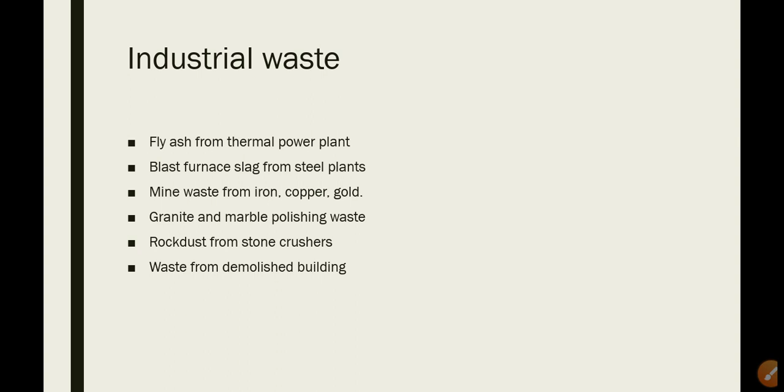Fly ash. Fly ash is obtained from electrostatic precipitation in thermal power plants. Fly ash generally contains silica and alumina. These products are highly active in combining with calcium hydroxide at ambient temperature in the presence of moisture, leading to hydrated Portland cement. That is, fly ash has similar properties to Portland cement.

Fly ash can be used as pozzolana in lime pozzolana cements. Addition of gypsum in small quantities will accelerate the strength gain in cements. Blending of calcium hydroxide, fly ash and gypsum is important if the full strength of the mixture is to be achieved. The strength is low at 7 days, and a dry mixture of calcium hydroxide and fly ash should be used within 7 days of mixing, since the shelf life is very low.

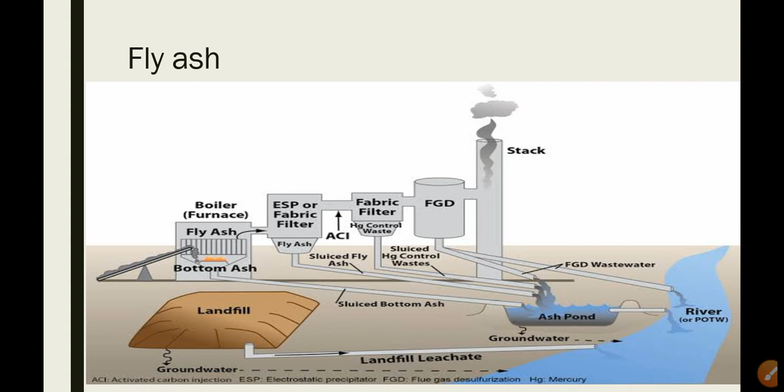Now, in this image, the bottom ash is brought through this elevator and put in this furnace. There are two types of ashes you obtain here. One is the fly ash that gets combined with the air due to its light density; it just flies off. That's why it is called fly ash, and whatever has higher density becomes the bottom ash. This bottom ash, through a sluice, is collected in the ash pond.

Next, what happens with the fly ash? The fly ash is taken to the next segment. In this, the fabric filter or the electrostatic precipitator is used, where the fly ash that was in the air is trapped, collected at the bottom, and sent again through this sluice gate to this ash pond.

Even after this filtration, some more lighter particles are trapped in this fabric filter, where the Hg control waste, that is your mercury controlled waste, is collected and again sent to this ash pond. And in the next stage also, the lighter fly ash particles are collected in this cylinder and sent to the ash pond.

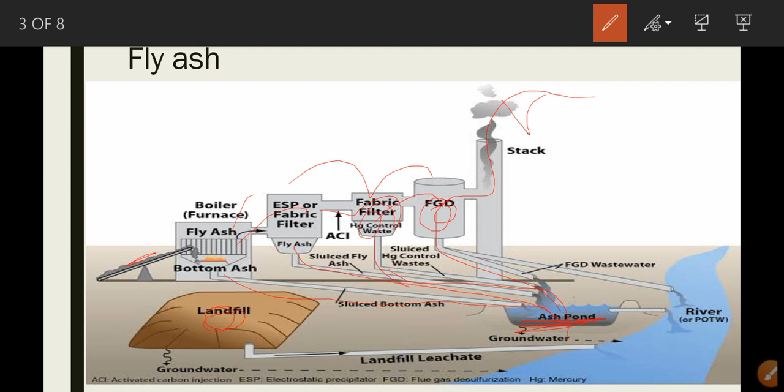Next, from the landfill, whenever you have this ash pond, the water and the bottom ash are mixed together, and as it settles down, the ash in the pond is collected at the bottom and the cleaner water is let out as an effluent into the river.

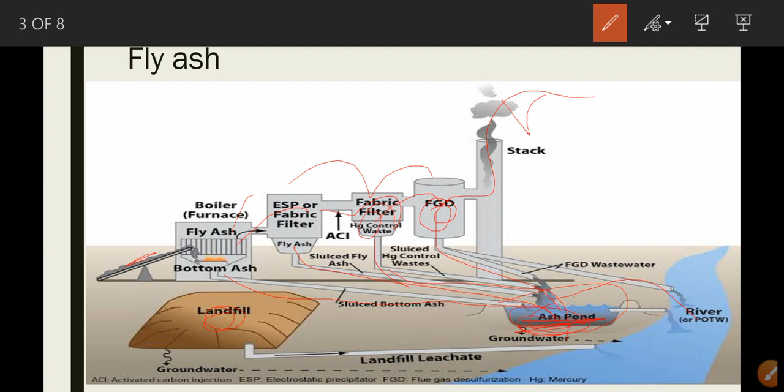Again, whatever concentrated water is there, it is sent to another dam. Again, the cycle repeats till the water is clearer. The slag from blast furnace has cementitious properties. It can be used as a substitute for your cement.

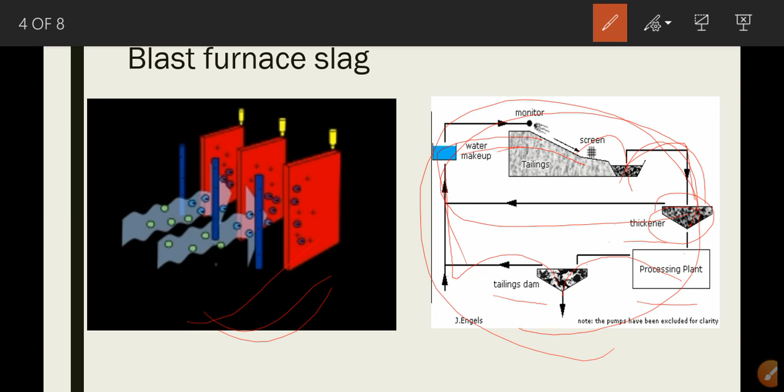Portland blast furnace slag cement is made by grinding normal clinker with slag. This cement has sulfate resisting properties and is ideal for use in aggressive environments. That is sulfate resistance. Normally, for seashore structures or chemical industries, the silos made for chemical industries, which are very reactive to sulfate. In construction of such silos, you can use this blast furnace slag cement.

Now, gold mining tailings. Gold is often extracted from finely crushed granite. The waste granite dust after removal of gold is a fine material of no use. It is often predominantly silty in nature and does not have pozzolanic properties. That is, we cannot use it as a cementitious material; it does not have any binding material in it.

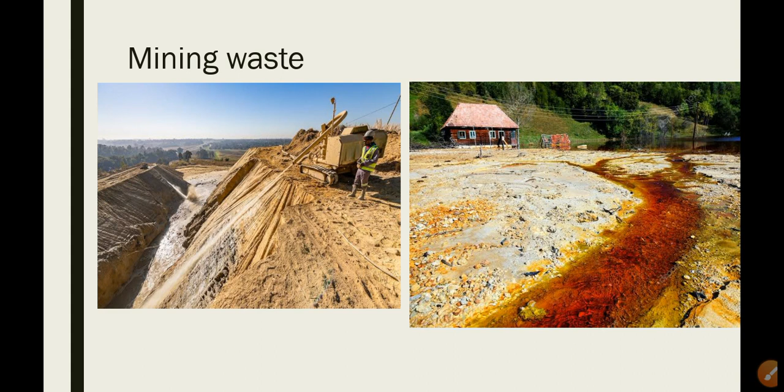The Kolar Gold Fields of Karnataka have 35 million tons of such waste. It can be ideally used for building blocks after mixing with cement and sand. Now, these gold mine tailings are not reactive in nature, so they can be used as a fine aggregate supplement, or you can say a replacement. Okay.

Now, we go for the screening of this. After screening, we differentiate whether the size of the particles is less than 4.75 mm sieve or greater than 4.75. If it is greater than 4.75, it can be used as a replacement for coarse aggregate. If it is less than 4.75, it can be used as a natural sand replacement. Even in this replacement, you have to check the inert properties of it.

Next, we have the percentage of it. Sand particles to an extent of 79% and silt particles to an extent of 19%. In Karnataka, Kudremukh Iron Ore Company has stored the iron ore tailings, which amount to 150 million tons. Okay.

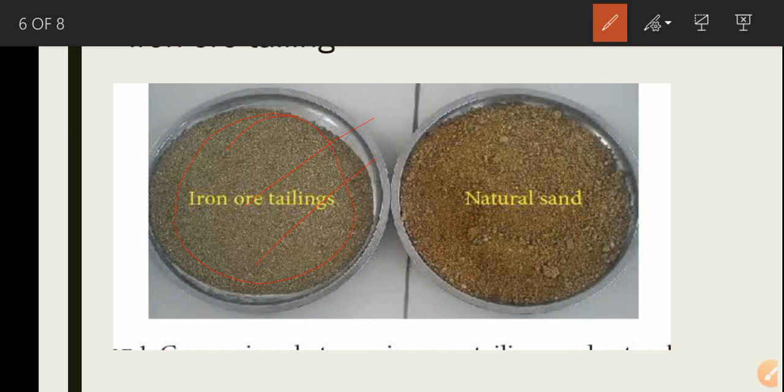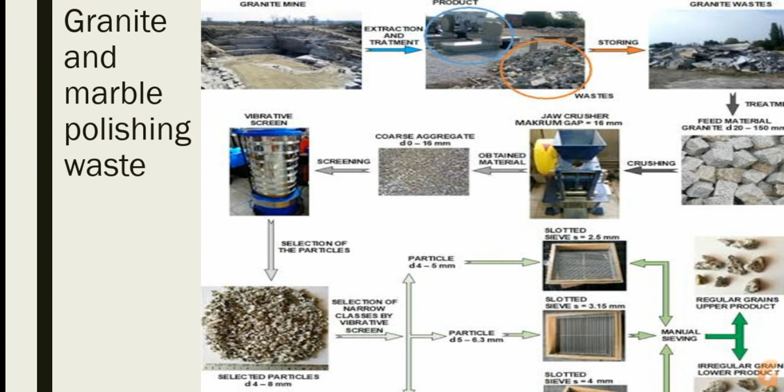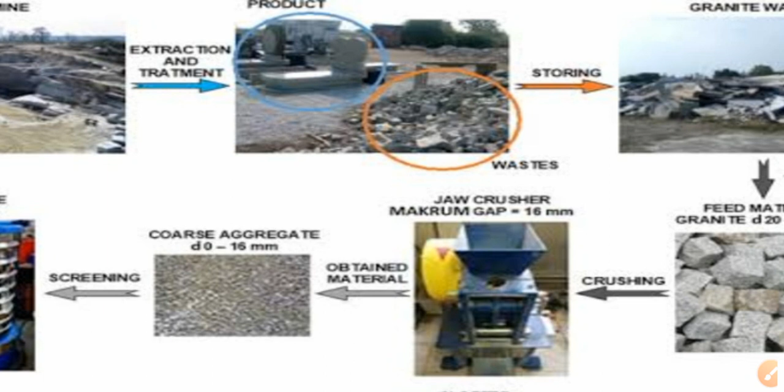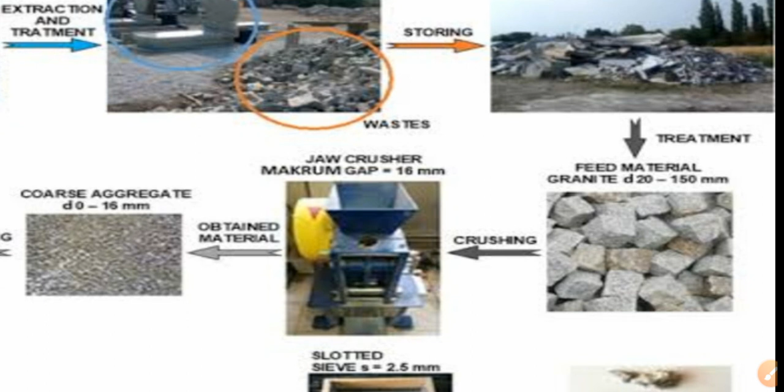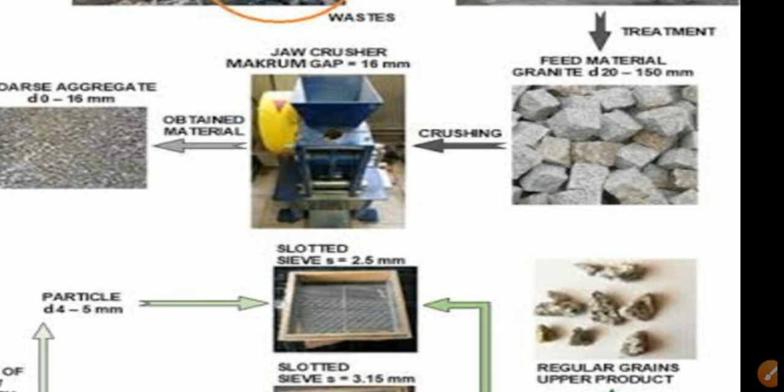Next, here is the fine product, and this is the waste, when it is not in the proper shape and size. The other waste, that is the cut edges and unwanted particles, is the waste produced from the factory. Next, this is the storage of it. Then the treatment is done, or it is sent to other crushers. If it is not present in the same crusher, you can send it to the other crusher where the crushing is done.

It is sent over here. Here you can see the crushers. It is called here the jaw crusher. It crushes the material depending upon what teeth it has in this crusher. Now here it is a 16 mm crusher, with which you can obtain 16 mm size aggregates.

Now these aggregates are again sieved based on the sizes. Here you can see a vibrating screener, which we have in our labs also. You have the manual one, and you have the vibrating one. Here you can see the segregation of the particles has been done. Next, screening depending upon three main crusher sizes, that is 4 to 5, 5 to 6.3 and 6.3 to 8 mm sieve. These are the different slots present, which are segregated depending upon these sieve values.

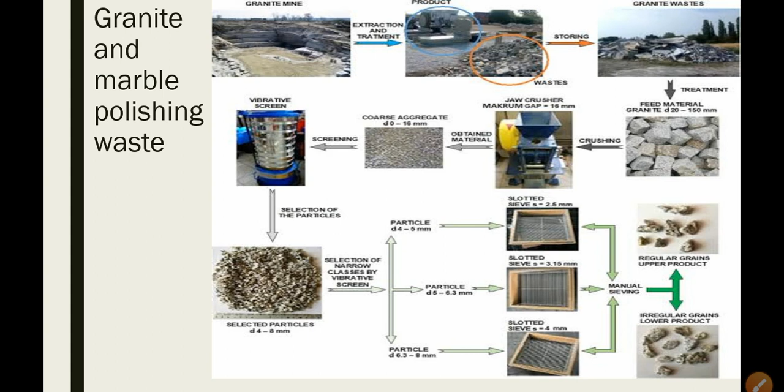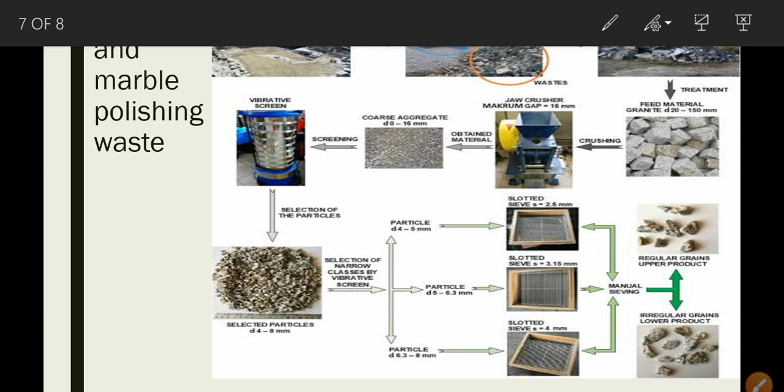Next, one more element in this is the polish waste. What is polish waste? The dust that occurs whenever polishing takes place. To reduce the dust being produced, they sprinkle water. Along with this water, the dust particles settle down and are thoroughly washed off, and this dust along with water is collected in one pond and allowed to evaporate. Once the water evaporates, the remaining dust is used as a fine silt for plastering. You can use it along with cement for plastering.

The last one is waste from demolished building materials. Whenever we demolish a residential or public building, you do not get one type of waste material. We get different waste: concrete, bricks, wood, tiles, granite, marble, different types of wood particles, steel, iron rods and so on. So many types of building waste you get.

Now how do you segregate this? First of all, segregation, that is sorting, is most important. In sorting, we sort into timber, metal and plastic. In timber, all the wood elements come. In metals, it can be the rods used for reinforcement, or other metals, door metals and so on. Next, plastic from household materials can be segregated as plastic waste.